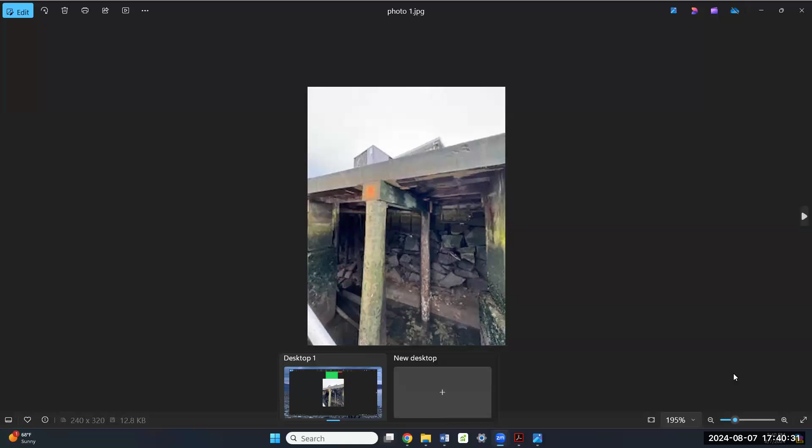Yes, hi. So I wanted to provide you an update on the emergency certificate. Smith Marine has been out there doing the work. They started a little later than anticipated, but they were working on the low tides only to be able to do the work. They were able to do a portion of the work, and they gave me an update today because they just finished yesterday as to what they were able to complete. So they were able to complete bents 6, 8, and 10.

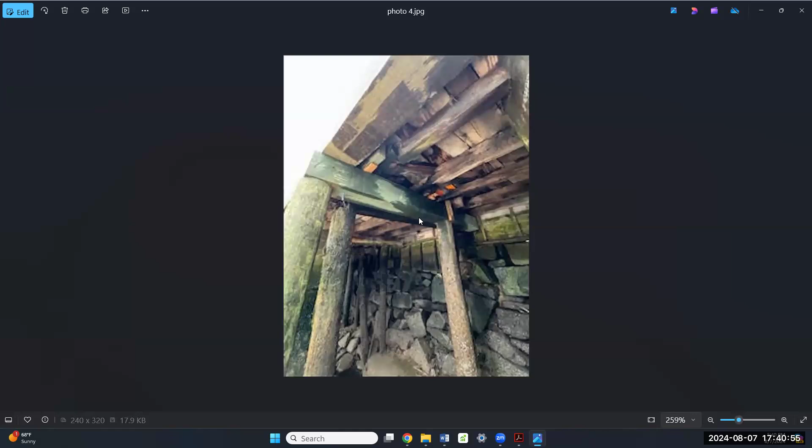They installed 12 by 12 timber cap beams, which were supported by a piling on each side, as you can see in the picture. They installed two stringers and cap beams on each end of the concrete of the pier. He didn't tell me the exact location. They installed blocking, some short stringers, which are more of a temporary solution, I believe.

They did a full concrete repair at bent 5 with rebar to that column, and they replaced one fender. They also secured the gangway platform with better fasteners and washers. That was all rotted, he said. And this portion was obviously necessary because, per Lisa O'Donnell, it would prevent any collapsing.

What they did not get to is from bent 5 back towards the ground. So they weren't able to get to it due to the tides. So we still need to do that work. And I just got updated from Lisa, who has not actually done a site review as of yet. We're going to plan to do one after I talked to her about this meeting today.

She is requesting if I could ask you to get some sort of extension to do the Bent 4 back. Smith had to leave the job—they were pulled off for an emergency elsewhere that they had contracted, because they had gotten a late start to begin with. So we feel, as she said, from the ground, from the concrete, the Bent 4 and back she feels maybe we can get to without accessing the water. She does feel there's an update, and I sent it last minute to Chuck, her recap of everything.

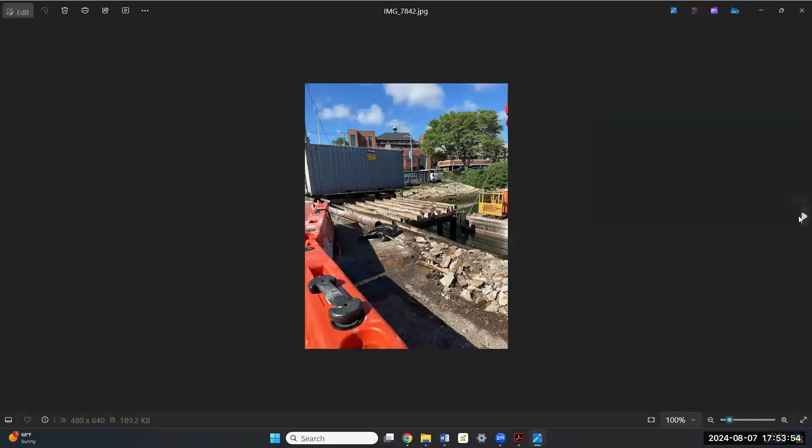We were anxious because of this section, thank you Chuck for posting my pictures. These are from today. There were several pictures I sent with the request for the emergency certification showing we needed to remove all of the concrete on a 65-foot section from the corner of the building. If you could go to that last slide, Chuck, from the corner of the building, everything from there out into the harbor was completely rebuilt.

It started in '98, I think they completed in 2002, and we purchased the property in 2003. So those pilings, all the structural stuff on that property, was totally redone after a catastrophic fire they had there, and they lost the wharf and everything. So that was all rebuilt.

But there's one section that we used to have these storage containers on. They were there when we bought it. We think the pilings, because they have actual branch knots sticking out the side of them, are probably 100 years old. Unfortunately, the previous owners poured concrete on top of concrete, really put about 10 inches worth of concrete and rebar on it.

When we bought the property, we didn't have any real use for that, but we saw that was something we should never put any loading or weight on. This past winter it got worse, and we removed all of the trailers that were sitting on steel I-beams, not fully supported by this, but the concrete itself began to sag. There were cracks in it.

We knew the only way to do that would be to get a demo crew to get it out of there, and using a barge is the safest way to do it. Happy to report, and I'm actually surprised to be honest that it went smooth. You see the sections of concrete stacked on the deck of the barge in that photo. That's all of it - nothing fell.

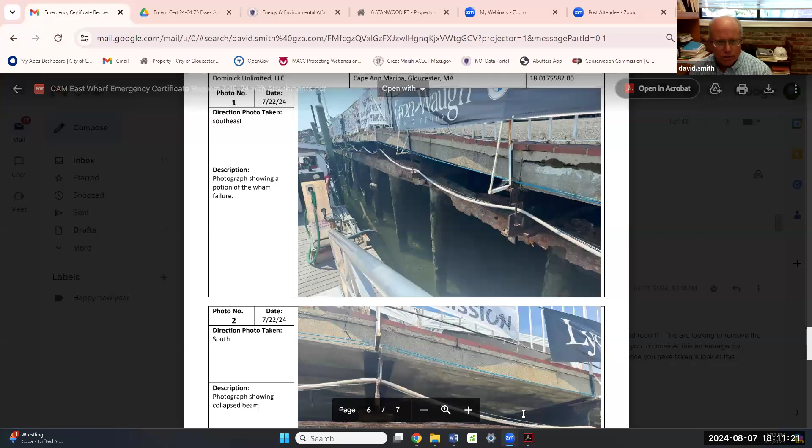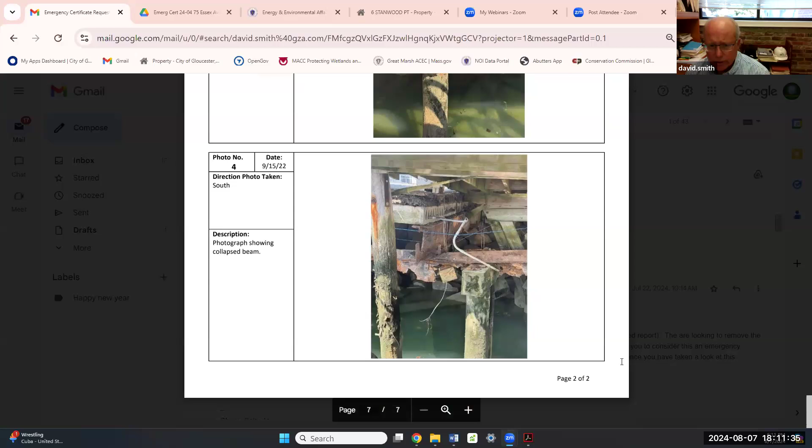So just answer that one question, Mr. Smith, about what amount, if any, debris fell into the water. Sure, yeah, no debris fell in. When it collapsed, it basically just sunk. Maybe some of the gravel along the edge that makes up the sandwich between the bituminous paving and the precast planks fell in, but it was just stone that kind of fell on stone. I haven't been to the site to see the final, but I've been told by the owner that it is clean. Very little debris actually went into the riprap or the water during the demolition. Yeah, that's how it happened.

Okay, all right sir. Chuck, do we need to memorialize it? It already has a date and stamp. This one also needs to be ratified.

Charpentier moves to approve emergency certificate 24-04 for 75 Essex Avenue. Commissioner Cook seconds. Roll call: Member Charpentier, yes. Member Cook, yes. Member Sergeant, yes. Member Materi, yes. And Member Villa, yes. Okay, thank you, sir. Good luck.

All right, we're moving out of emergency certifications and we have a bunch of previously continued items. Let me turn the light up. So I don't know, Chuck, just for the public's sake, I guess we should let them know what's in and what's out here in terms of continuations. Should I rip through them all? There's a bunch here, right? Yeah, I think if you just read the NOI number and the address, you don't have to read all the rest of it.

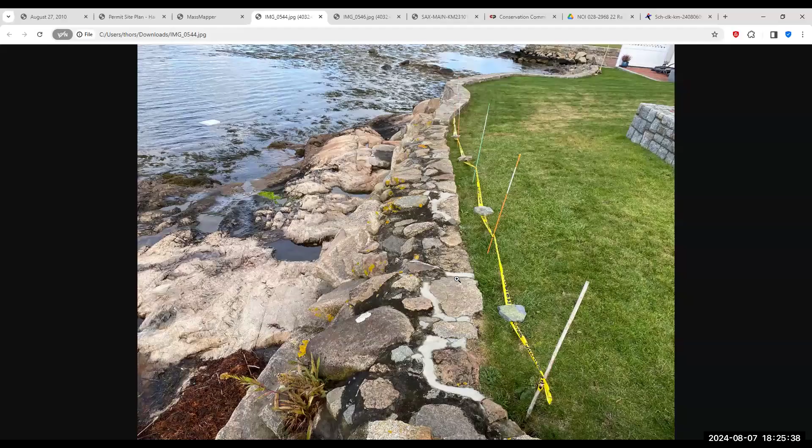I suppose I should show the commissioners a few pictures as well while we're here. So this is a good picture of, this would be the southernmost portion of the wall, the lower portion of that building, where the association is having the biggest issues. So you can see the tape and the mark has been put out here to prevent people from walking in these areas along the edge of the wall here.

And what's been occurring is sediment and soil has been getting sucked down through the back of this wall and out through the bottom of the wall. There are some pretty significant voids at the bottom of that wall. This is actually probably one of the better sections, but there's a lot of voids that exist along the bottom of the wall. And when seawater interacts...

What our observation was is that when seawater constantly interacts with holes in walls, especially on the bottom half, it tends to pull sediment from the inside, or the landward side, of that wall out into the ocean. And so you have developed sinkholes of some kind along the landward side of the wall. And over time, they get worse. And you also have, of course, impervious areas landward of these areas, which may be contributing as well.

And also the fact that you see a lot of these weep holes are located very high up on the wall where they should be much lower. And, you know, this is an older wall, of course, likely portions of it original to the development at Hawthorne Point in the 1980s, so the construction standards and methodologies were a bit different back then as well. So this application and materials we provided you will try to explain our methodology and thoughts behind the ways to repair the seawall.

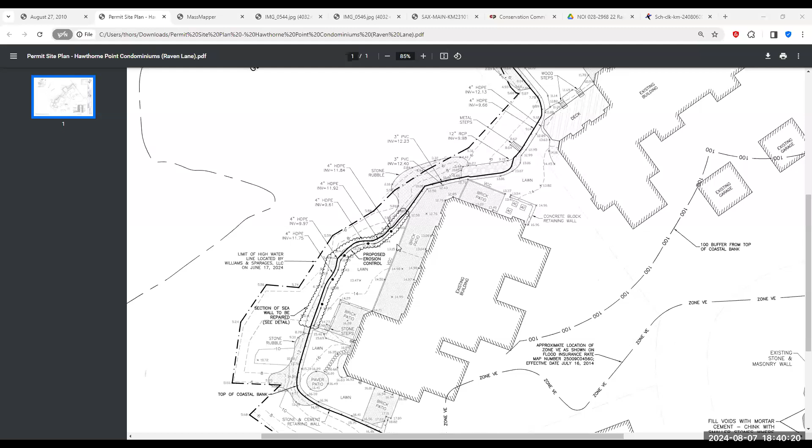All right, commissioners, if no one has anything else to add... I have some follow-up comments on that.

If we're agreeing that it's subject to the stormwater standards, then there is a requirement in number 9 for a long-term operations and maintenance plan. I don't know how you get around that if you're acknowledging it's subject to those standards.

In terms of the groundwater only being what comes through the weep holes, that doesn't seem right to me. It seems like, as the drawing is submitted, you have a 4-inch layer of loam and seed over a layer of crushed stone that goes to where it enters the weep hole, then crosses through the concrete and masonry wall, and exits into the resource area. So if there's surface runoff water on the grass area, it would infiltrate through the crushed stone, go through the weep holes, and come out into the resource area. So I don't see that as only groundwater. Maybe I'm mistaken, but to me it seems like there is a stormwater concern there.

So if the weep holes are functioning as a stormwater conveyance or system, I think they're going to require a long-term maintenance plan under the stormwater standard.

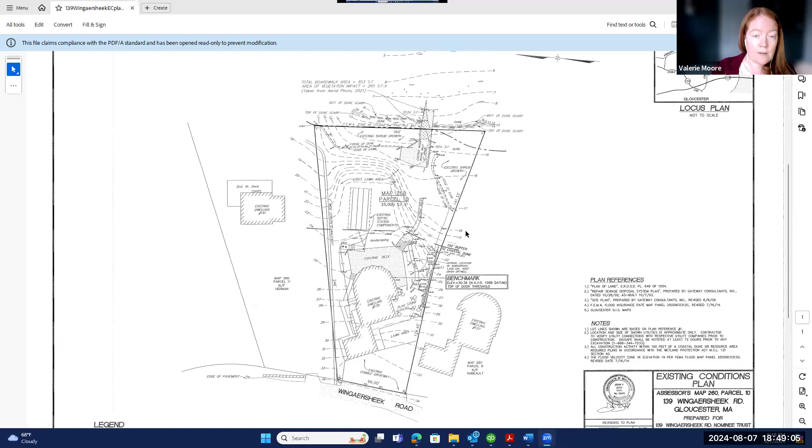As you can see on the screen, the proposal is to remove the existing wooden boardwalk, and Mary can show where the footprint of that existing boardwalk is, and to revegetate the areas that were previously vegetated that were removed when the boardwalk was put in. As you can see, particularly extending out to the left, there's a significant area of replanting, and in the middle there as well. If you want to switch to the other plan, it shows the proposed work.

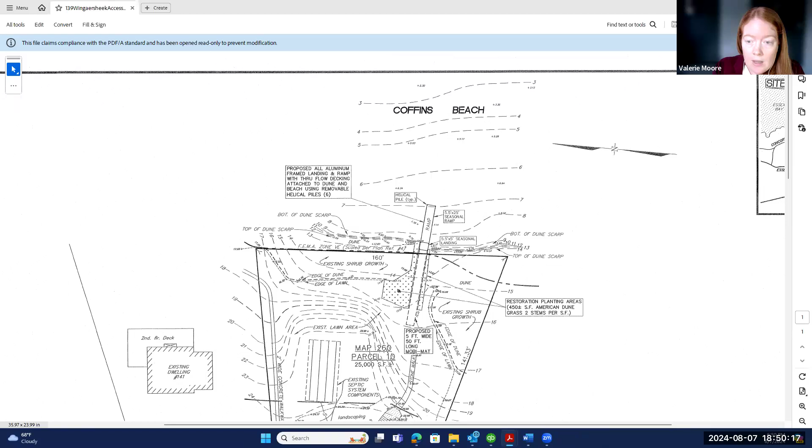We're still proposing to remove the boardwalk, and that will be done in compliance with the time of year restrictions. We are continuing to propose the plantings in the areas of vegetation that were previously disturbed to restore those areas. We do still propose to seasonally install a Mobi mat on the existing path in order to better protect the dune. The mat will be installed again in compliance with time of year restrictions, and the anchors for it would be all hand installed. It would be removed each year on a seasonal basis.

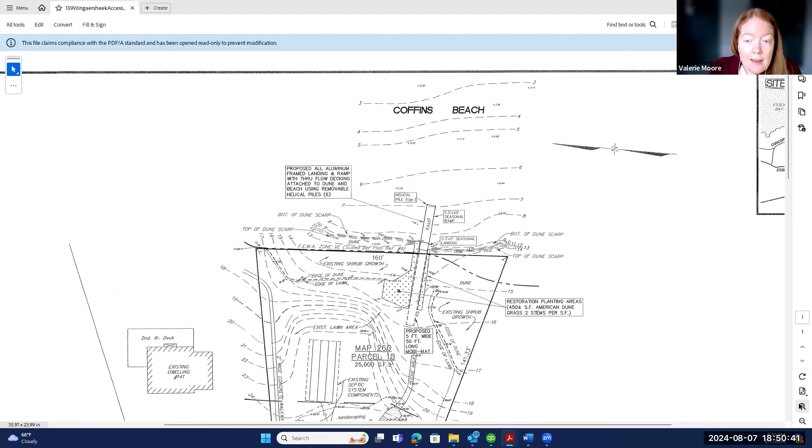Because of that very sharp drop off that can't be navigated, we now propose to install a seasonal rollaway ramp with a platform at the top that will better protect the dune and provide access down to the beach below over that significant drop off.

The proposed work has been thoughtfully designed to comply with the performance standards in the Wetlands Protection Act for work within a coastal dune, and those are the ones I'll walk through now, because I think those are the most significant ones with respect to the proposed work.

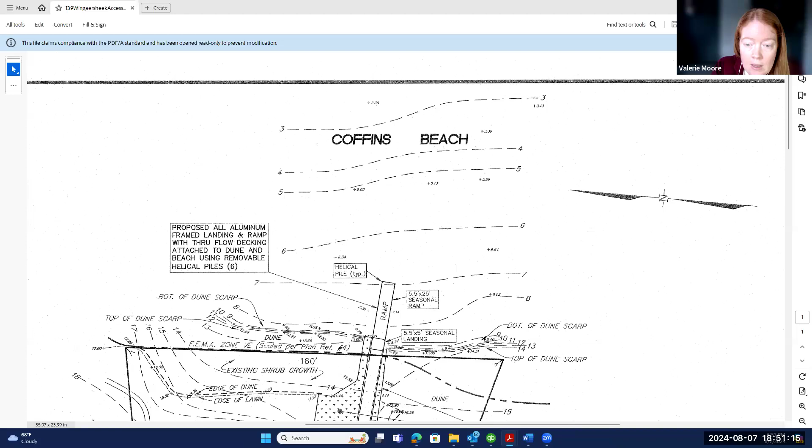The first standard is that the work cannot affect the ability of waves to remove sand from the dune. The proposed ramp would not impact that ability. It would still continue, as it doesn't obstruct that, and doesn't put any permanent structures within the dune.

The second standard is that it cannot disturb the vegetative cover so as to destabilize the dune. The proposed work would, in fact, restore parts of the vegetative cover, so it would not be disturbing it further—it would be restoring that, meeting the second standard.

The third is that it shall not cause any modification of the dune form that would increase the potential for storm or flood damage. This should not impact the dune form at all. In fact, it would be more protective than existing conditions, because we'd be removing that boardwalk structure, and better protective than existing access, because it will protect the dune from the impacts of pedestrian traffic over the dune itself.

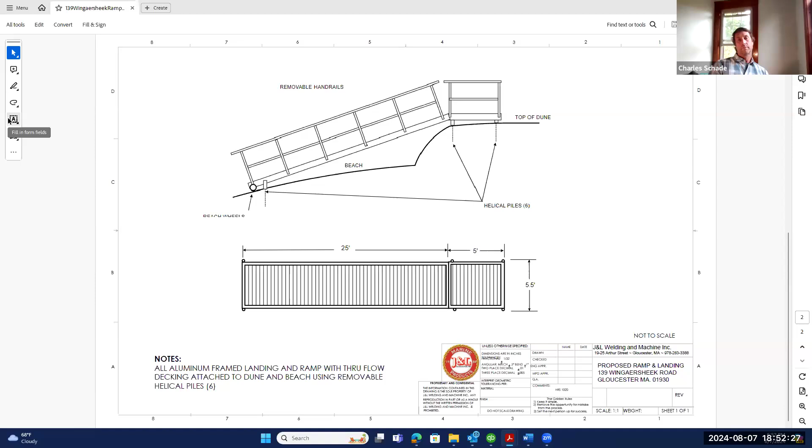As to the fourth standard, it will not interfere with the landward or lateral movement of the dune. Again, there are no permanent structures proposed within the dune, so it would still be able to move. The dune will still erode and grow as the seasons change. Unlike a permanent structure, because it is a rollaway ramp, it can adapt to the dune as the dune migrates, as opposed to a permanent structure that would require greater impacts and eventually need to be replaced if the dune were to move.

The fifth standard is that it will not cause removal of sand from the dune artificially. Obviously, this will not cause any removal of it, because again, there are no proposed permanent structures within the dune.

And finally, that it will not interfere with mapped bird habitat. Here, we've worked with NHESP to address their comments. As you may recall, with the prior form of the plan, NHESP had expressed some concerns. We were able to address those with proposed conditions and proposed changes to the plans, and NHESP indicated that it will issue an approval and provided their proposed conditions to the commission.

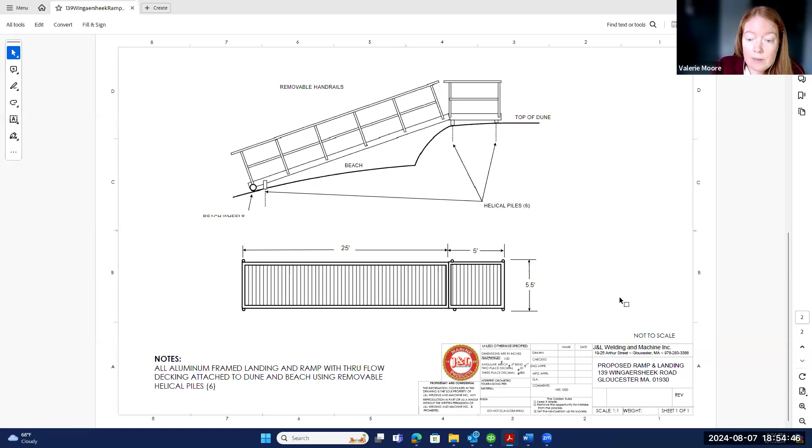Before turning it over to you for questions and comments, I wanted to point out that we did provide responses to DEP, which had also commented on the prior proposal. We have received no further comments from them at this time, and NHESP's comments have been addressed. So with that, we're happy to answer any questions you may have about the proposal and the specifics of it.

We can also bring the plans back up as needed. Okay, Ms. Rimmer, thank you for that.

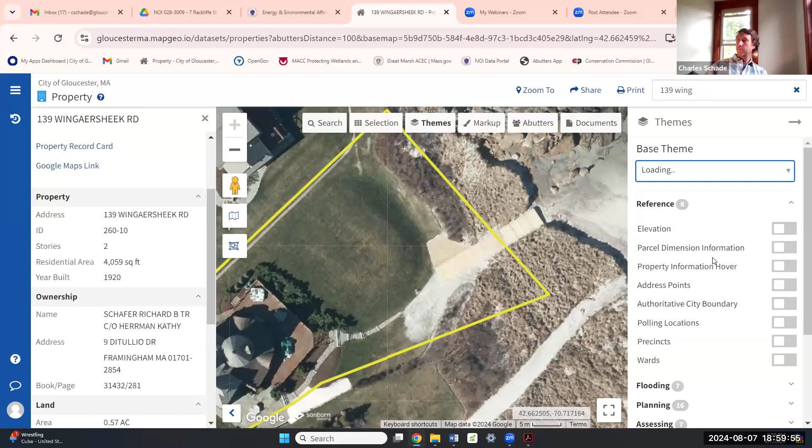That dune extends probably much further up than is being shown. Even other photos in other areas have been disturbed by the ATVs and parking of boats and stuff. This whole area, you need to do a better delineation, I believe, of where that dune extent actually is.

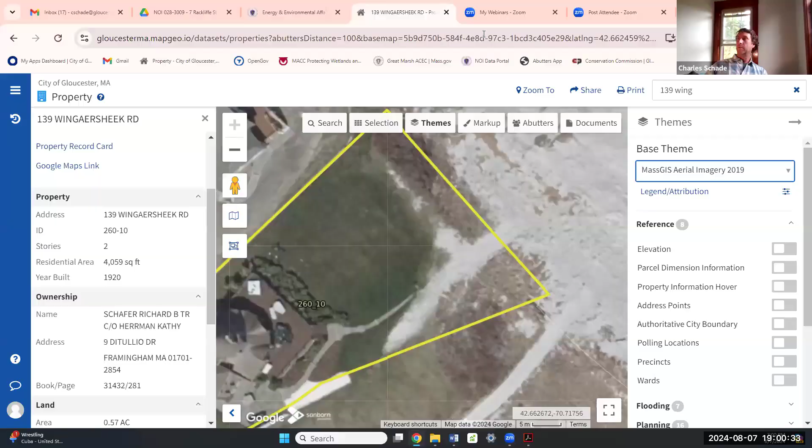The reason that's important is because you're only showing restoration and the use of MobiMat and the ramp for this lower portion of the dune, but you're not addressing the entire dune area where this activity is taking place. So I think there needs to be a revisit of the actual delineation for future iterations. I agree this needs to be removed seasonally, but also want to note it should not be stored within the dune area after removal — it should be moved out of the resource areas.

Okay, Ms. Rimmer, do you want to respond? Yes, I will. I understand that NHESP's comments are not final yet, so certainly we're not expecting the commission to act tonight, and will likely ask for a continuance, given that your next meeting is the 21st and they've said by the 24th they'll issue their comments. I would suggest it would be the meeting after the 21st.

I'll first speak to Commissioner Cook's comments about the 3-foot path width that you referenced. That comes from a guidance document from the Office of Coastal Zone Management. It's not, in fact, a performance standard within the Wetlands Protection Act regulation, so it's not binding on this commission, and it certainly is not something I would suggest applies to an existing pathway. This isn't a new proposed pathway where there wasn't one previously.

For ATVs? For ATVs, I think the ATVs could go on the lawn itself. That's a good question. So for that section right there, they may go on the lawn and then over that overwash area. It's pretty firm there, so I don't anticipate any risk to changing dune form or function, because it's lawn primarily. But that's something we can look into as well.

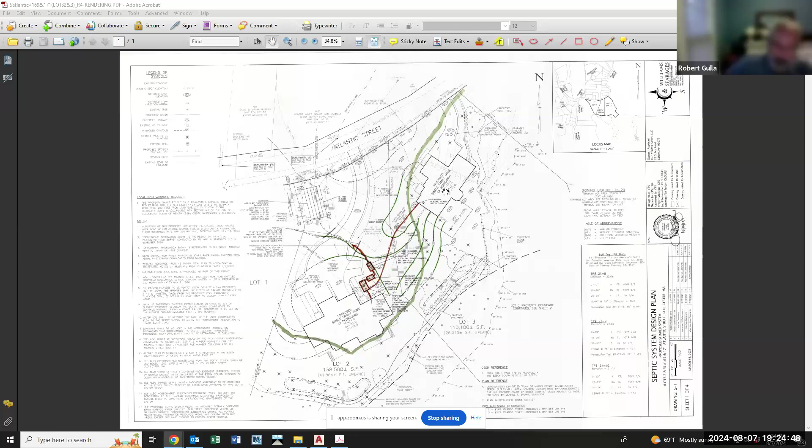Mr. Bishop, can you hear me? Yep, name and address for the record. Robert Bishop, 176 Atlantic Street. I just wanted to confirm with Chris and the committee that lot number 2 is now officially a single-family home, not a duplex per the agenda. As well as lot number 3 is also a single-family home.

For you, Mr. Chair, both proposed dwellings are single-family homes. Thank you very much for confirming. You're welcome. Anyone else got their hand up, Chuck? There are no other hands up at this time. Seeing none, hearing none, close public comment period.

So commissioners, do we need to go through unit 2, or was this the only discussion? Did this cover 2 and 3, or just 2? I believe the plans are showing both lots 2 and 3. Okay, so we dealt with both at the same time then, we're good to go? I have 2 minor modifications in front of me, this is the problem, one for lot 2, one for lot 3. So Mr. Schumer, what did we just talk about? Which one? That's both, Mr. Chair. That's what I wanted to hear. Okay, great.

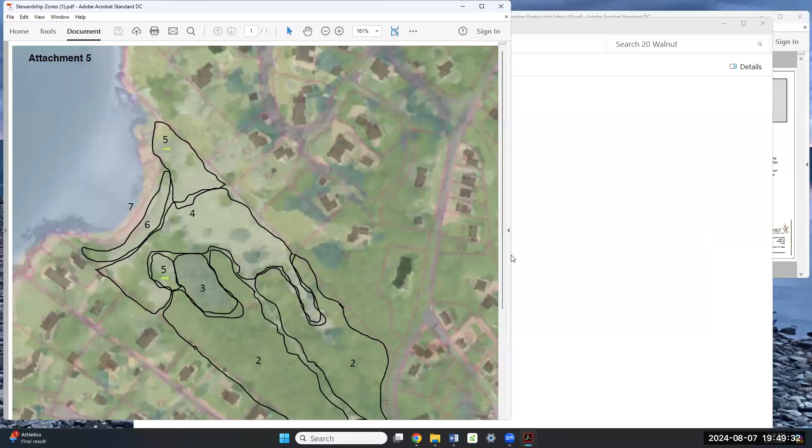Well, what are you planning to do here? In a nutshell, we're seeking approval to engage in a targeted weeding project on this parcel of about 12 acres. We're not engaging in any wholesale removal of large areas of vegetation. Our objective is to selectively remove invasives while being careful not to disturb the native vegetation. We will also at times be replanting to introduce more healthy biodiversity. Over the past 3 years, we've been working with experts in ecological restoration, mainly Mass Audubon, who has written a very extensive restoration and stewardship plan for us, which I submitted along with other maps and information.

We've also done our own extensive research to ensure we're following best practices that are feasible for this particular situation, in which we're mainly relying on trained volunteers. We were smart enough to know what we didn't know, so we sought out a lot of expert feedback, and now we feel we have enough guidance and knowledge to move forward, which is why I'm here presenting this project.

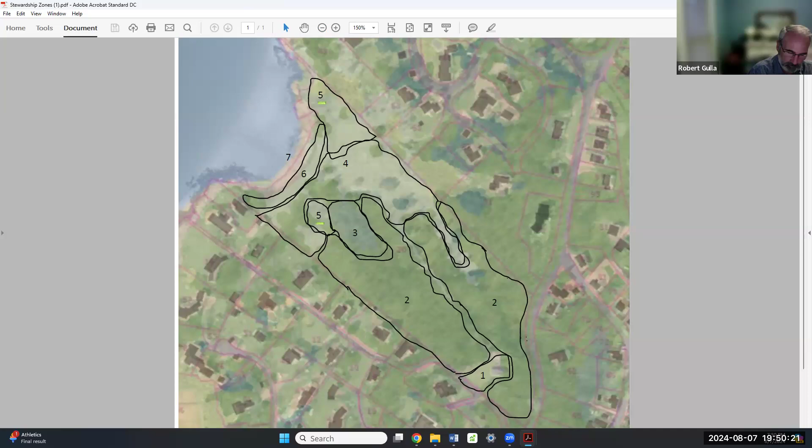I'll open up for public comment first. Anyone in the public who wishes to speak towards the RDA at 20 Walnut Street, Squam Rock Land Trust, may do so by hitting the raise your hand button at the bottom of your screen, or hitting star 9 on your phone or handheld device. We currently have 10 attendees and there are no hands up.

We'll go on to commissioner roll call comments. Member Charpentier: I'm assuming there are no trees coming down with this project. Maybe you can confirm that.

Actually, we are hoping to take down some Norway maples, mostly, actually all of them, over on the more southern side. They seem to have crept in from the edge towards the buffer zone and the wetland area, which Audubon calls the wooded swamp. How many trees are coming down? Well, we counted, and there are approximately 30 that are larger than 6 inches, and there are a lot of small saplings that we would like to remove as part of this process.

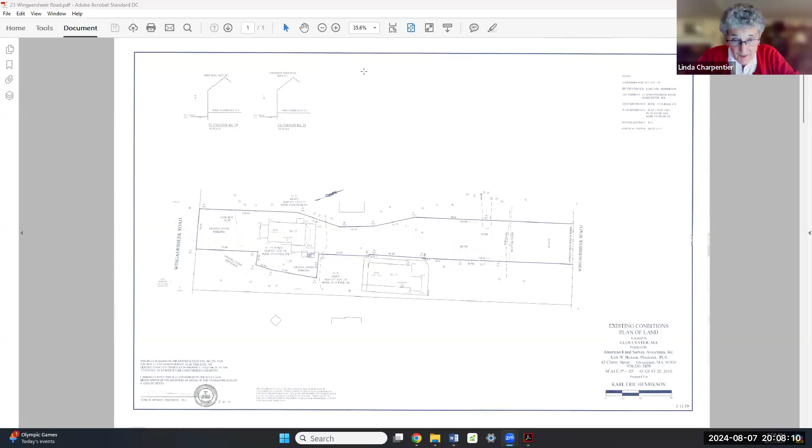Fair enough. This is the survey of the current state of the property before the house renovations. The house is the top one there, and this is our proposed plan. During the restoration project of the house, a company came in and degraded the dune, so our number one objective is to restore the dune with natural vegetation, mostly beach grass, some chokecherry, and bayberry. We also have other landscape enhancements we'd like to do along with that.

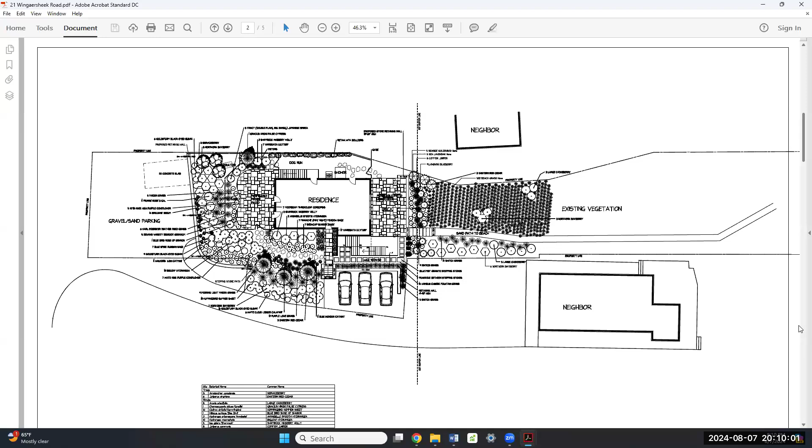This is Lisa Bierman. We are proposing some permeable paver patios and native vegetation all around the property, with a focus on using permeable pavers and stepping stones for areas of entertainment and sitting. The remaining space is native vegetation throughout, as well as replacing a retaining wall at the front of the property that is falling apart - existing conditions are timber, and we are replacing it in pretty much the same location. We've provided engineer details for the walls, as well as details for the berm planting and permeable pavers we are suggesting to use.

If that's the summary, I will open this up to the public for comments. We currently have 9 attendees and there are no hands up at this time. Okay, then I guess we would need commissioner comments.

Member Charpentier: none at this time. Member Cook: I'd like to know what the current condition is in the front of the house, facing the resource area. Is that all dune area that you're planning on converting to patio? Basically, what are the existing conditions, so I get a better understanding of the changes you want to put in? We can show you pictures.

Why don't we go through all the commissioner comments and then you can deal with them at the end - I think it's more efficient that way. Member Sargent: I'm wondering if there's going to be an increase in impervious surfaces, and I'd like a 2-year monitoring period for the mortality of plantings. Member Materi: no comments.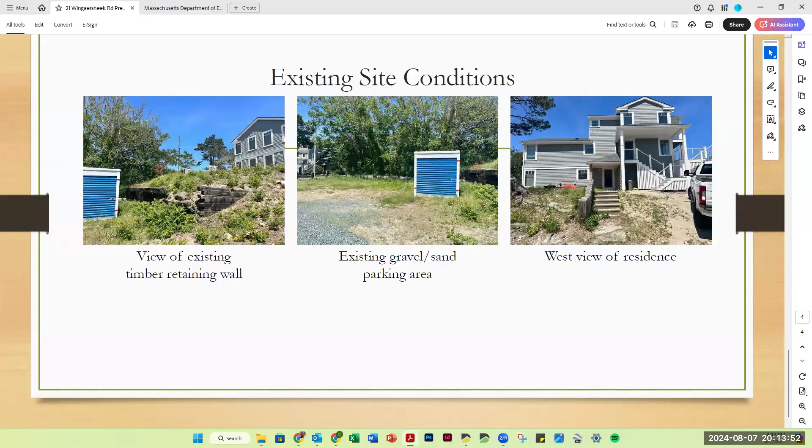And then also regarding the question of pervious versus impervious areas, the new pervious, permeable areas would be approximately 900 square feet. And we're considering the new wall would be impervious, that'd be 230 square feet.

And as far as the 2-year monitoring of plants, sure. Yeah, yes.

Chuck, do you have any comments on this?

So we were out there on the site after some of the work in the front dune. That portion, they're going to be restoring. There's a lot of non-native vegetation in there, so the intent is to restore it to all native beach grasses and other native plants.

The wall, I don't know if they mentioned, it's holding up where the leach field is for the septic. That wood retaining wall that's falling apart is functioning as holding back the whole leach field for their septic system, so I think that's an important thing to address there.

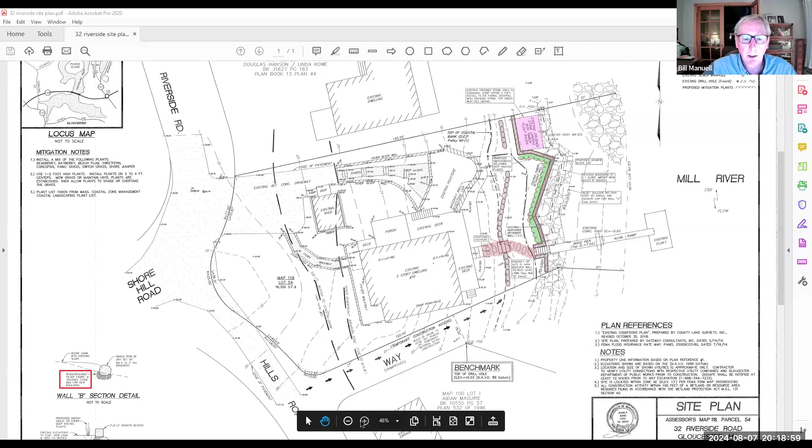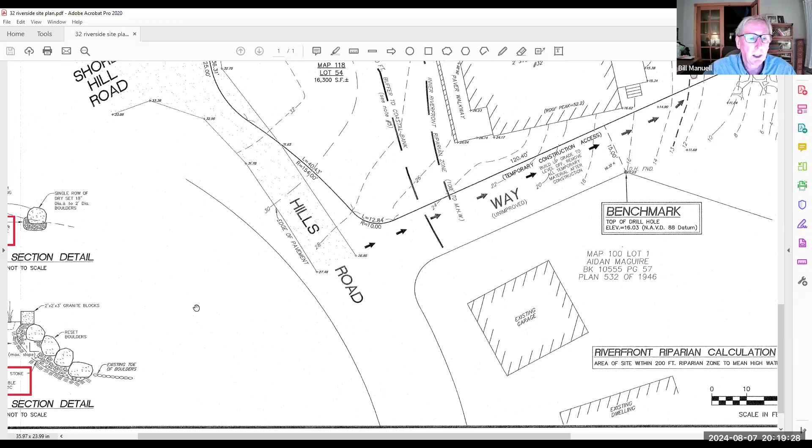We've had the extent of boulders surveyed located, so we know precisely where the toe of the rocks are. What we're going to do is stack these boulders, restack them at about a 1-to-1 angle of repose. We'll dig out behind the wall—there's a standard detail—and backfill with crushed stone wrapped in filter fabric. This is all dry set, so it allows water to come in and go back out, but it won't drag the soil out with it.

I think the commission has seen this sort of repair on numerous sites around Gloucester. On the uphill side of the wall, we're going to put some salt-tolerant grasses, in this case switchgrass. It has a very deep root system, which should help stabilize the ground above the wall.

A secondary part of this project is another one of these coastal resiliency measures. As of last winter, the owner has seen tides come up over the wall here, higher than they've ever seen. I think that's common around Gloucester—people have seen record-setting high tides.

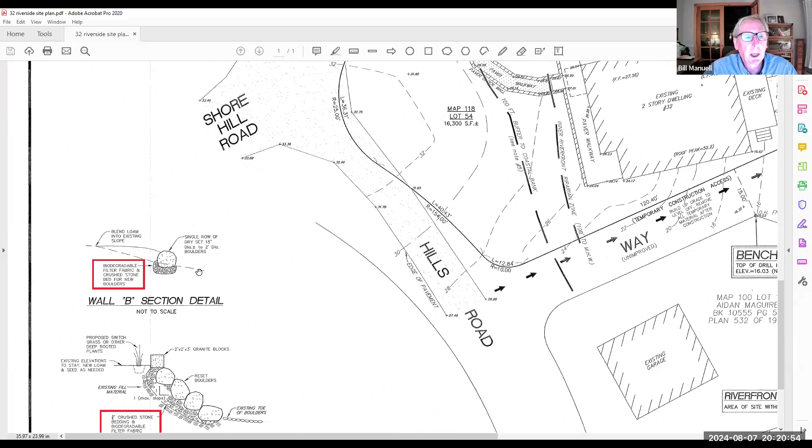So, much like 18 Riverside, we're going to do a secondary landscape wall. This is again a dry set wall—really it's better described as a line of boulders. If you look at the detail, we're going to get large boulders about 18 inches and set them side by side in a bed of crushed stone encapsulated in filter fabric. You can see from the contours that the yard slopes down, so we'll bring the grade up about 18 inches and feather it back into the existing grade behind this dry stack boulder wall.

That will take a little bit of slope out of the rear yard, but more importantly, it provides a resiliency measure against rising sea levels and more frequent high tides. We don't know exactly where things will go in the next 10, 20, 30 years, but we'd like to be prepared for it—that's the purpose of this secondary wall.

They're going to have to come in basically across the front yard through this unconstructed way. This also is sloping, and in order to get machinery in that can hoist boulders down to set them, we'll need to even this out a bit. So they'll probably bring in some temporary fill here. All of that will get removed at the end of the project, and everything will be restored to grass.

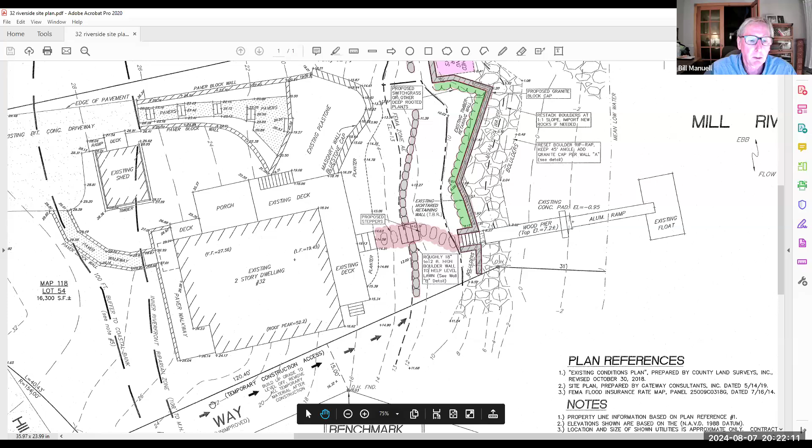This is where they haul the float up during the off season, and this area is also basically boulder stacked, making a little level platform. We're getting subsidence there, so we're going to peel off the organics—the upper layer, about a foot or two—put filter fabric down, backfill it with stone, and resurface it. It's like a pea stone surface right now. All of this is because we're seeing subsidence, and we just need to take care of it as normal maintenance.

I forgot to mention this little area here. There'll be some new steppers across the regraded portion of the lawn, a couple of new granite steps, and then steppers down to the entrance of the existing wood pier, ramp, and float.

So that's it. Okay, so I'll start by opening up for public comment.

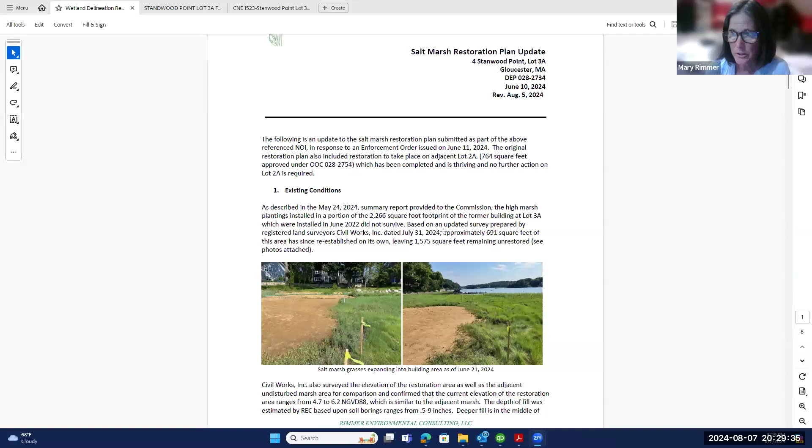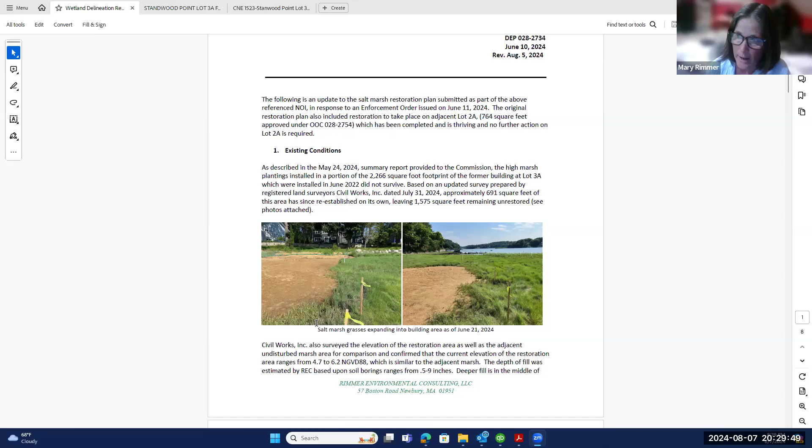This shows what the existing conditions were as of June 21st. I went over this at the last meeting: there was encroachment over their building area with the native grasses, so that's telling me the elevation is looking pretty good with that sand area there. We went over the material that was found there in the depths at the last meeting, and the only change I've made is keying in on this high marsh elder here.

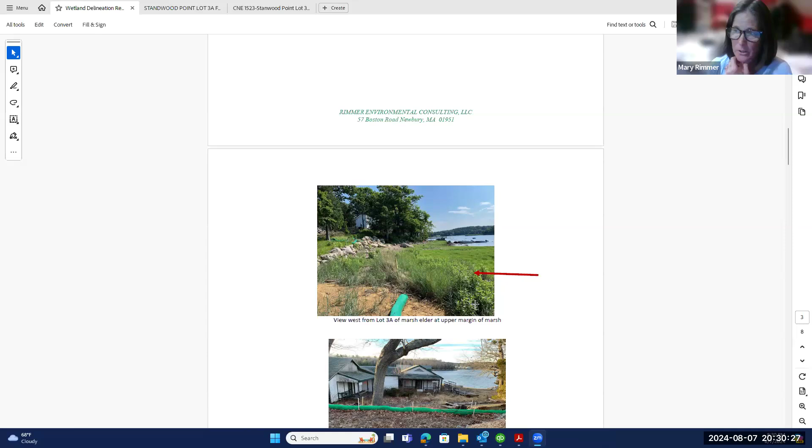I incorporated a buffer of the marsh elder along the upland edge. It's still part of the salt marsh, but it will provide a physical barrier. This is proposed in lieu of a fence. We can certainly provide a fence if you'd like, but this was my suggestion.

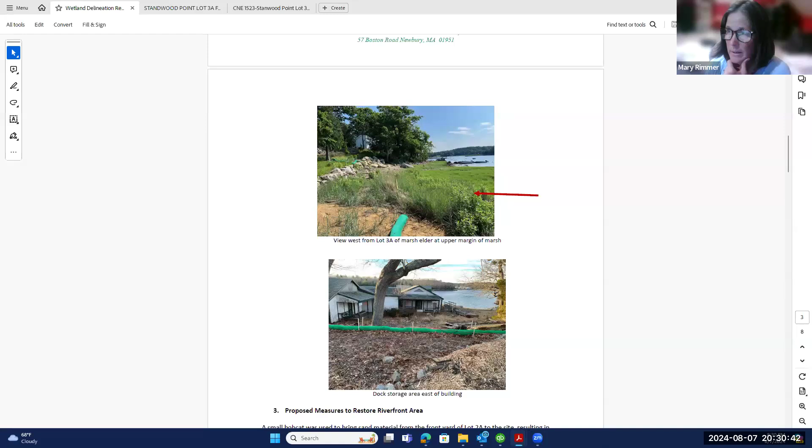So again, the building, there was dock storage right next to the building here. And if I pull up the plan that was submitted, you can see the building outline here, and the existing grass inside the building outline here. There's some bare areas here because, as you can see from the photograph before, there was dock storage right alongside the building, so this area was never particularly well vegetated.

So we're proposing to extend the vegetation into the bare area. This is a big rock right here, but the vegetation is proposed to extend beyond the building, even though it wasn't disturbed as part of this construction.

I just think it'd be a good idea to extend that. This would be an area planted with marsh elders mixed with switchgrass. It's at the upper end of the tolerances. We keyed the restoration to the salt marsh on either side. You can see there's a 5 elevation here that's existing, and a 6 elevation here that's existing. That's consistent with what we found in the original survey.

This is actually elevation 5.4, and then this is like a 5.3 essentially right here. So anything above 5.5, we propose to plant with the high marsh elders, again, to provide that barrier. Below that would be the Distichlis spicata, which would be the early colonizer in the high marsh. Along the edges, there is some Spartina alterniflora also mixed in with the Distichlis that's growing in there now. So based on the elevations we're seeing here, that's consistent with what we need for restoring the marsh in this area.

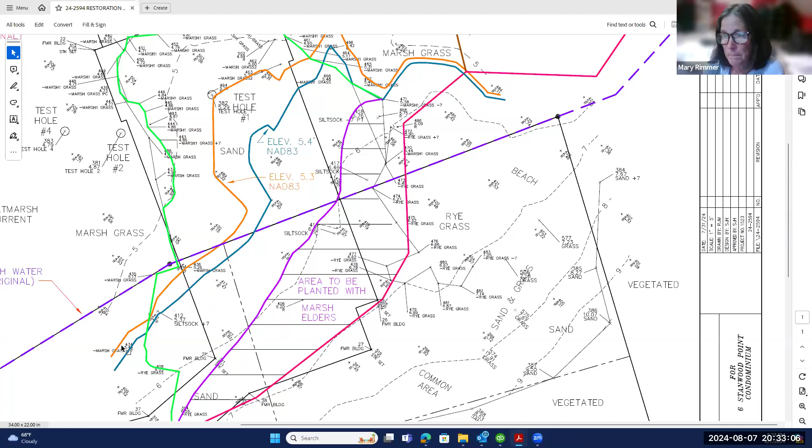I guess I'll let you ask questions at this point. Okay, thank you for that update. Commissioners, anything to add to that? Questions on that update? I think it was pretty thorough.

Go ahead, Dave. Thank you for that, Mary. You mentioned that some of the area started to reestablish itself with vegetation. I'm curious if that was the Distichlis, Patens, or something else. And I'm all in favor of the marsh elder or the high tide bush, but I also think that you need a split rail fence because people could step on that vegetation. Thank you.

Any other commissioners have any questions, comments? All right, we'll move on to the next one, which is 4 Stanwood Point, Rimmer Environmental Representative.

Yeah, I don't know, is there anything you want to resolve on this? Are we? I don't know. Chuck, what do you think? Do you need more information on this? Anything to add? Well, I mean, I guess, is the commission okay with what their proposed plan is? And then what's the next time that we would want them to report back to us, or that sort of thing?

I did also have a question too, if there's any follow-up on the 401 permit. No, I have not been able to reach anyone on the 401 issue, so there's no follow-up on that.